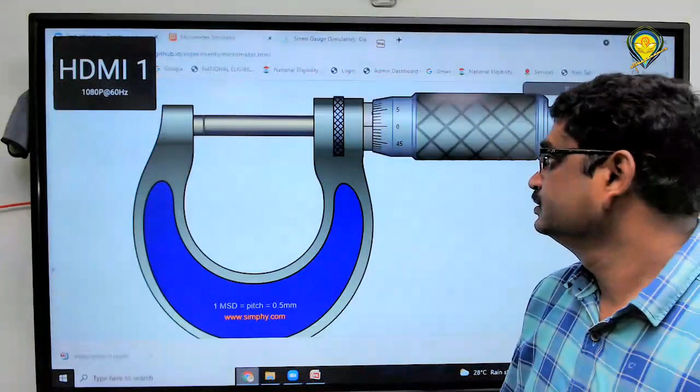Now, this is the screw gauge diagram. What are the different parts? Check it once. So here, what are the different parts? Any readings are there? Scales are there? Check this diagram once. Any scales are there or not? So two different scales are there.

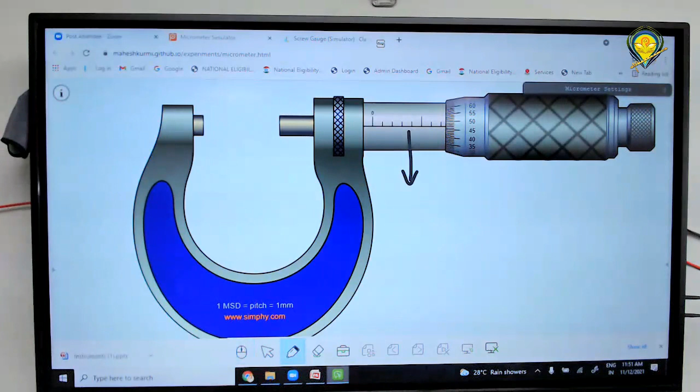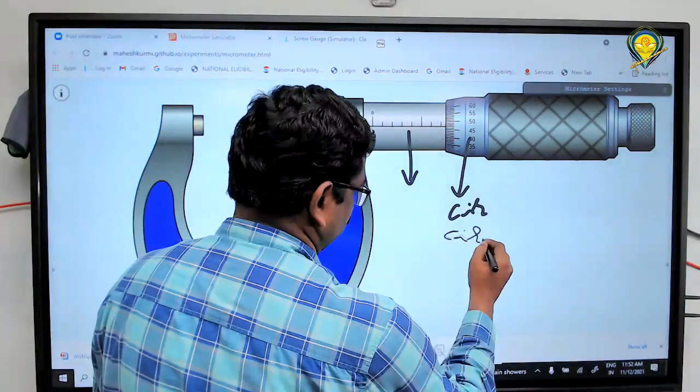So here two different scales are there. Check this diagram. This is the main scale. This one is circular scale. Only two scales are there. One is main scale, the other one is a circular scale.

Now, what are the different parts? These two are called studs. This is a main scale. This one is circular scale. Only these parts are there. Now, what about readings on circular scale? How many readings are there? Check this once. On circular scale, how many readings are there?

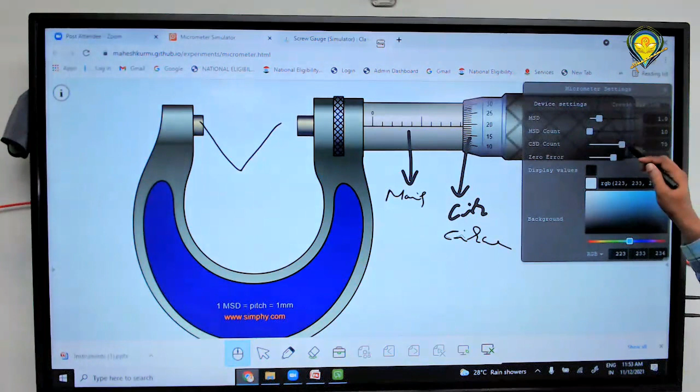So it starts from 0, 5, 10, 15, 20, 25, 30, 35, 40, 45, up to 95 and 0 again. That means 100 readings are there on circular scale. Some screw gauges have 100 scale readings. Some screw gauges have only 50 readings.

So check this one. This is having only 50 readings. It starts from 0, 5, 10, 15, 20, 25, 30, 35, 40, 45 and 0 again. That means it is having only 50 readings on circular scale. Some circular scales have 100 readings, some have 50 readings. So two types of scales are there.

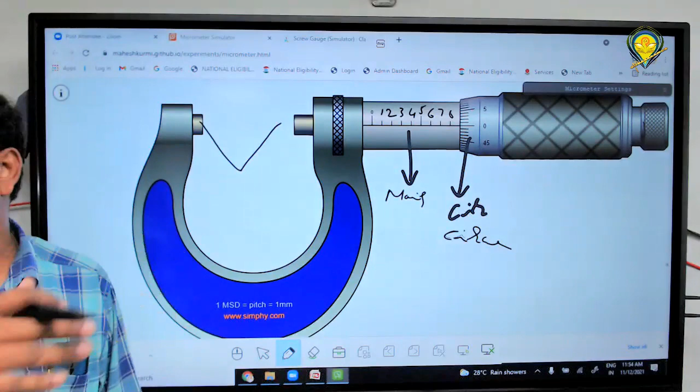Now, what about the horizontal scale? That is the main scale. What is the reading of that main scale? These are millimeter readings only. Each line represents 1 millimeter. This is 0, after that 1, 2, 3, 4, 5, 6, 7, 8, 9, 10 like that. So this is a millimeter scale. What is the unit of the reading? Millimeter only. Main scale reading is in millimeters only.

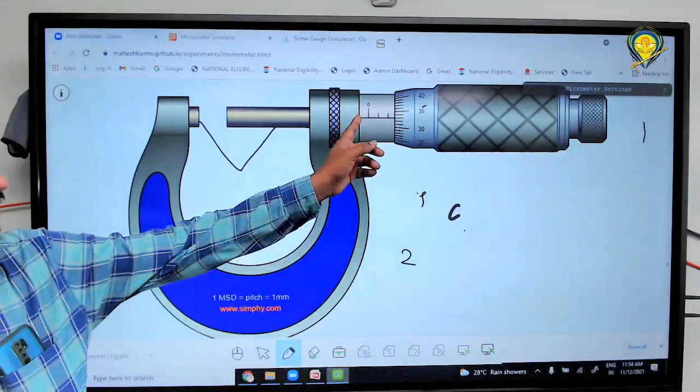So here check this one. What is the reading of this one? Can you identify the reading? How many lines are appearing here on main scale? 0, after that 1 and 2. So main scale reading is 2. You are able to view 0 line, first line, second line. So main scale reading is 2.

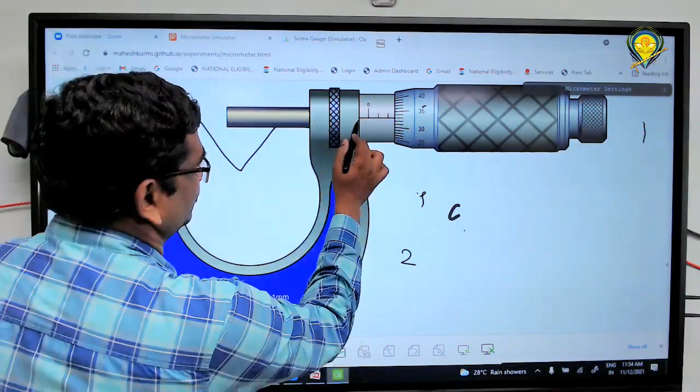Next, circular scale reading. The line that exactly matches with this one is the circular scale reading. So which number matches with the horizontal line? 33. This is 30, 31, 32, 33. So 33 is the circular scale reading. We are able to measure only these values.

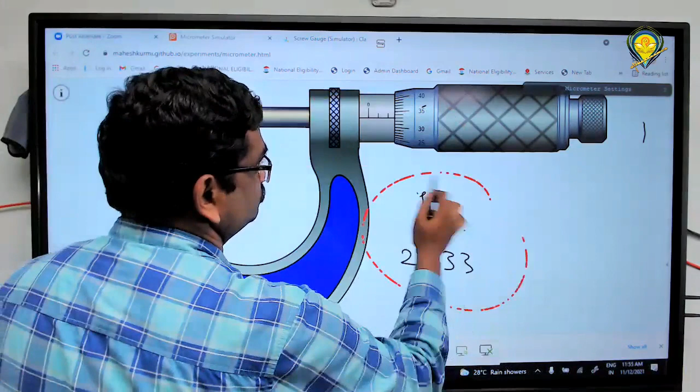For example, just place one object here. Without object, this horizontal line coincides with 0. That indicates that this is errorless. This instrument is not having any error. When the horizontal line matches with 0 without any object, then we can conclude that it has no error.

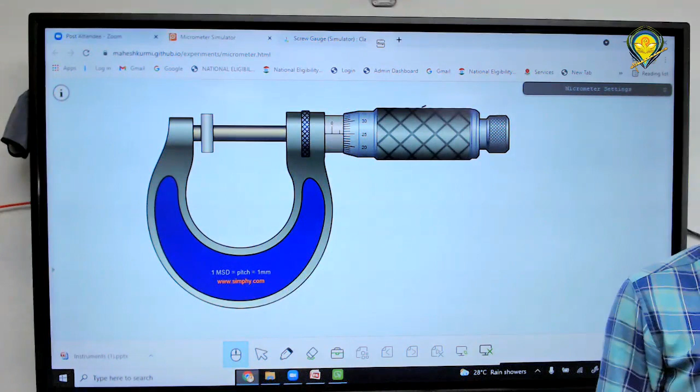Now, just place this object here. Now what is the reading? What is the main scale reading? 1 is the main scale reading. The remaining part you will get with the circular scale. Next, 25 is the circular scale reading. So we are able to measure only these two values by using screw gauge. Are the values clear or not?

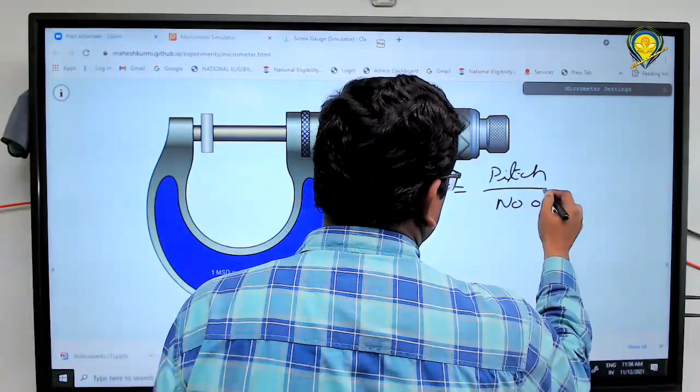Now coming to least count. How are you going to measure the least count of the screw gauge? For least count, we need to follow the basic formula. Least count is equal to pitch of the screw by number of divisions on circular scale. So check this diagram. What is meant by pitch of the screw?

What is meant by pitch of the screw? Pitch of the screw is nothing but the distance traveled on the main scale for one complete rotation of the circular scale. So if you complete one rotation of the circular scale, the distance traveled on the horizontal scale or main scale is nothing but the pitch of the screw.

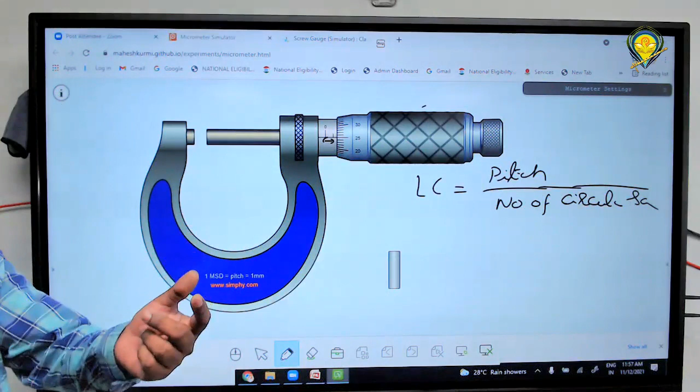There is another definition also. That is the distance between consecutive lines of the main scale. Simply, pitch of the screw is nothing but the distance between these two lines, the distance between two consecutive lines of the main scale, or the distance traveled by the screw gauge in one complete rotation.

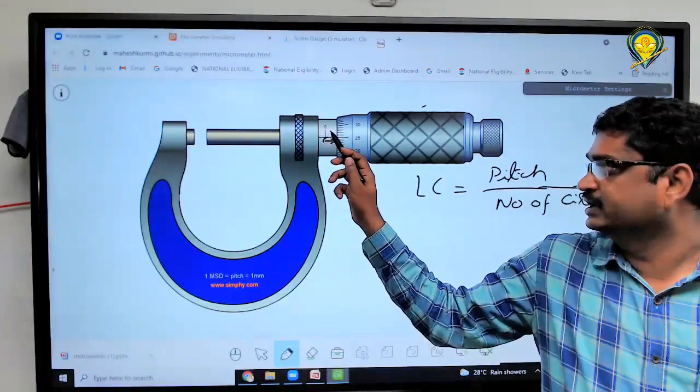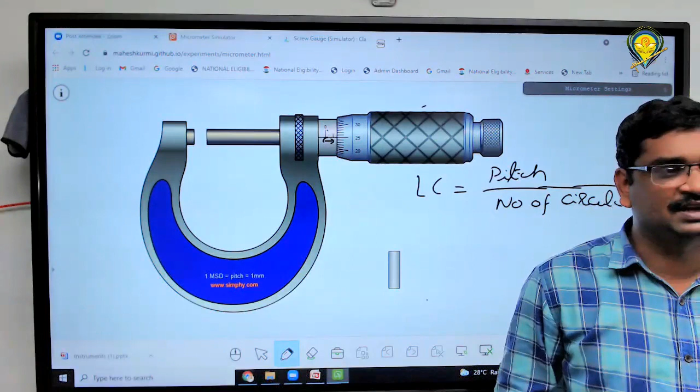So this definition is clear. Pitch of the screw means the distance between consecutive lines in the main scale. Here main scale readings are there. The distance between these two adjacent or consecutive lines is the pitch of the screw. That is one definition. The other definition is the distance traveled by the instrument in one complete rotation. Now let me explain that one.

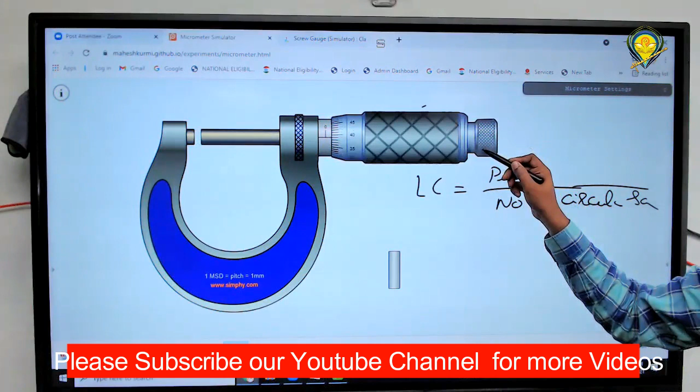So without object, 0 coincides, there is no error. Now try to rotate once. 25, 30, 35, 40, 45. So again it comes to 0. Zero means how many lines we are able to view? See, if I complete one rotation, check it once, how many lines we are able to view? So just after this one, we are able to view one line.

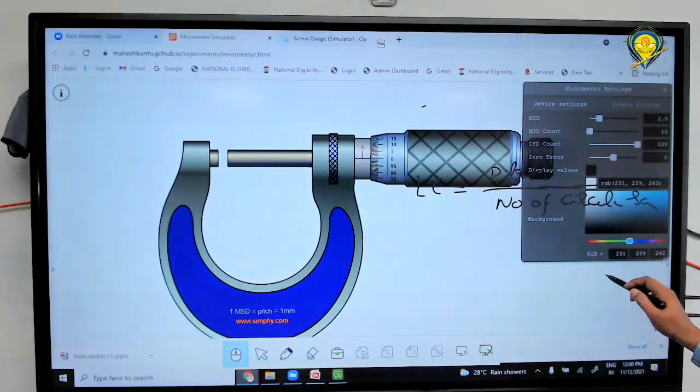So check this one here. I am taking a screw gauge with 100 circular scale readings. Without object, 0 coincides. Next, let me complete one rotation. Just after this 0, another line is there. So if it reaches 0, how many lines are we able to view? Exactly one line. So the reading is 1 mm.

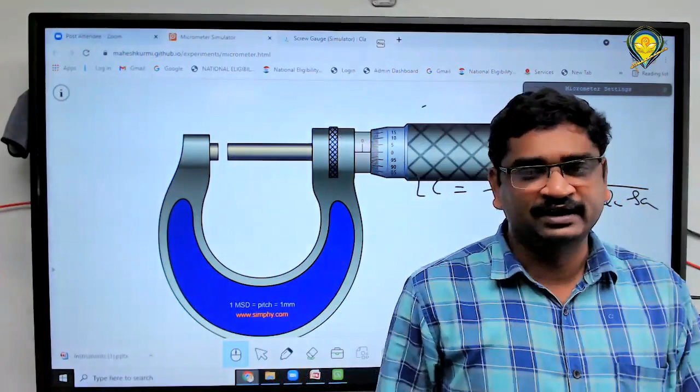So this is the distance traveled in one rotation. How much distance did it travel? 1 mm. For one rotation it travels 1 mm. So that 1 mm is the pitch of the screw. So here two definitions are there for pitch of the screw. One is the distance between adjacent or consecutive lines on the main scale. The other definition is the distance traveled in one complete rotation.

Now check the second definition. The first definition means simply the distance between these two. Distance between these two is the pitch of the screw. Now according to the second definition, pitch of the screw is nothing but the distance traveled by the circular scale in one rotation. Check it once. Let me complete one rotation. If it reaches 0, then it completes one rotation.

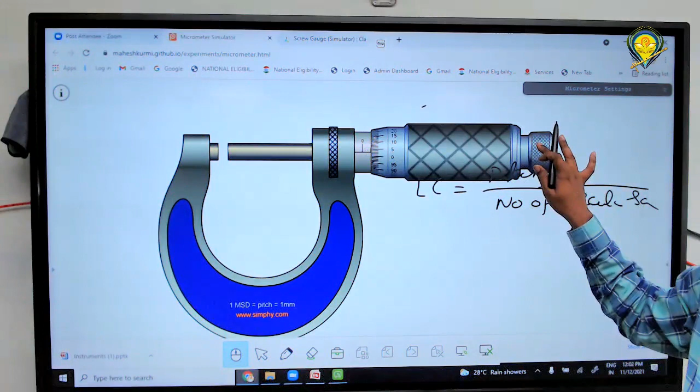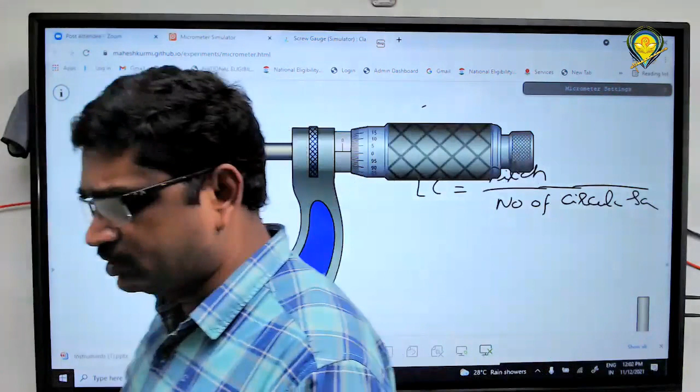One rotation. So how much distance did it travel? From 0 it reaches 1. It starts from 0 and reaches 1, so it travels only 1 millimeter. So the pitch of the screw is how much? 1 mm is the pitch of the screw. So what is the formula for pitch of the screw? Distance traveled in one complete rotation, or the distance between adjacent or consecutive lines. That is the basic definition.

Least count formula: pitch of the screw by number of readings on the circular scale. So that is the formula. Only one formula is there. Here you need to know the pitch of the screw only. There is confusion about the pitch of the screw; if you know that one, then this is completed. Now, go through the topic once.

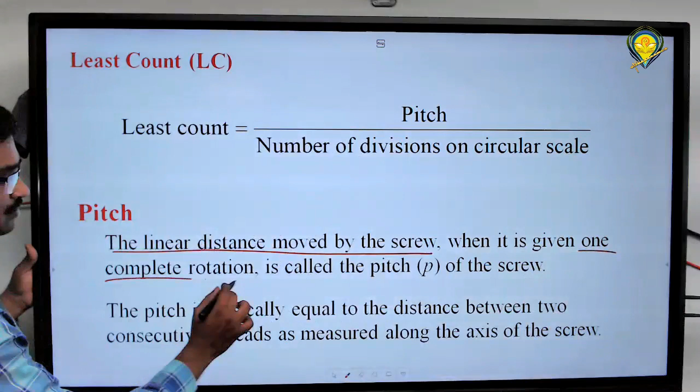What is the basic formula? Least count is pitch of the screw by, not number of rotations, number of divisions on the circular scale. Now, what is meant by pitch of the screw? It is the linear distance moved by the screw in one rotation, or the other definition, the distance between two consecutive threads or consecutive lines of the screw gauge. These are the basic definitions to identify least count.

Write down this one. Screw gauge, first formula, least count, denoted by LC. Least count is pitch of the screw by number of divisions on the circular scale. Pitch of the screw, first definition: horizontal or linear distance moved by the screw in one complete rotation. Write down like that. Second definition: the distance between two consecutive threads.

So from screw gauge to screw gauge, the number of circular scale readings will change, and the horizontal scale readings also change.

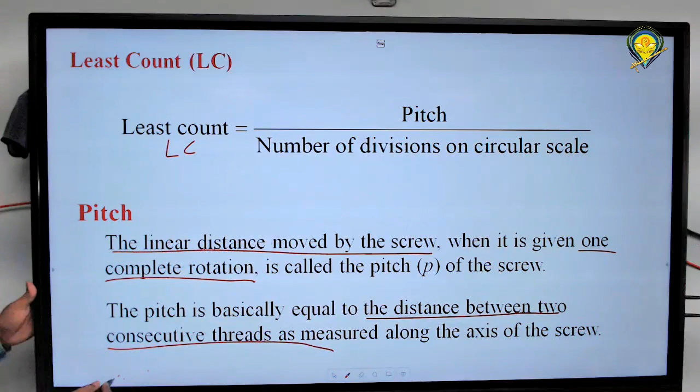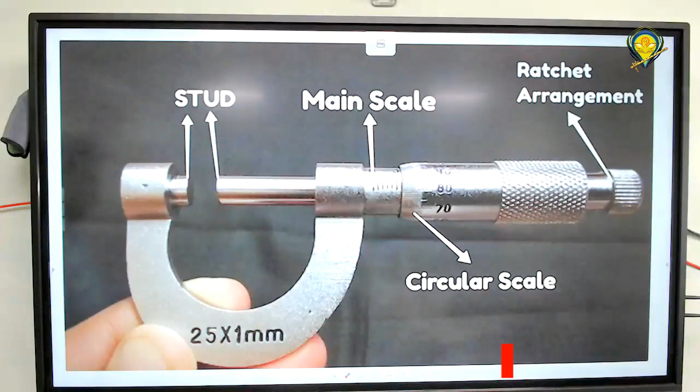So check this diagram once. Here he mentioned 25 into 1 mm. That means main scale reading is 25 millimeter, and each line is 1 mm.

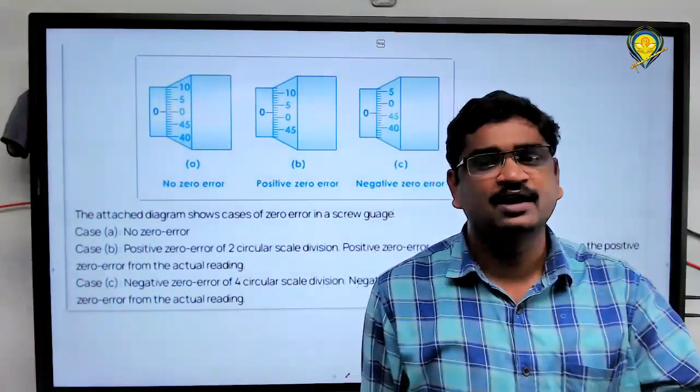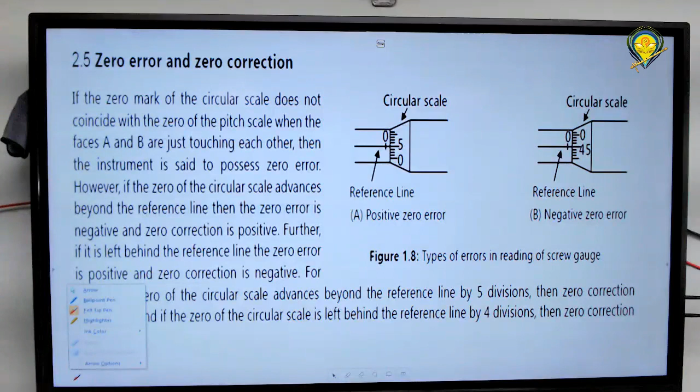Next, coming to the errors. For example, assume that the screw gauge is having some error. Then how are you going to identify whether that is a positive error or negative error? That means we need to add some value or subtract some value if it is having some error. So error unde em cheyali manam aithe add cheyali ledante subtract cheyalsi vastadi. So errors gurinchi kuda telusukovali. What are the different types of errors? Here positive zero error, negative zero error, and no error condition also.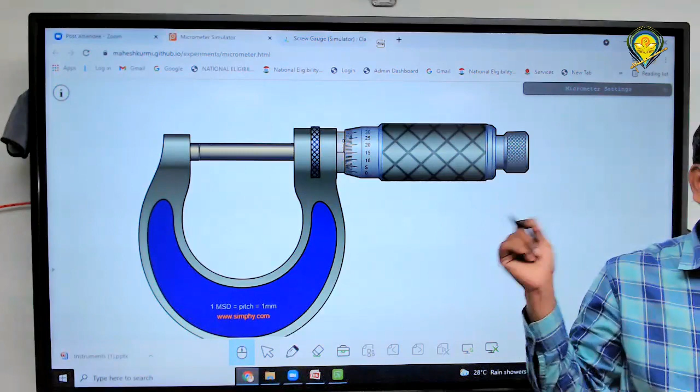Instead of 0, how much is it showing? 15. So instead of 0, it is showing 15. That means it is showing some extra reading. So we need to subtract this much value from the final reading. It is showing extra, so we need to remove that extra part. So this error is called positive zero error.

So for positive zero error, we need to subtract. We need to do the reverse process. If it is positive error, we need to subtract. If it is negative error, we need to add. Our general mathematical rule: this is showing extra, so we need to subtract. Next one, if it is having some negative error, then

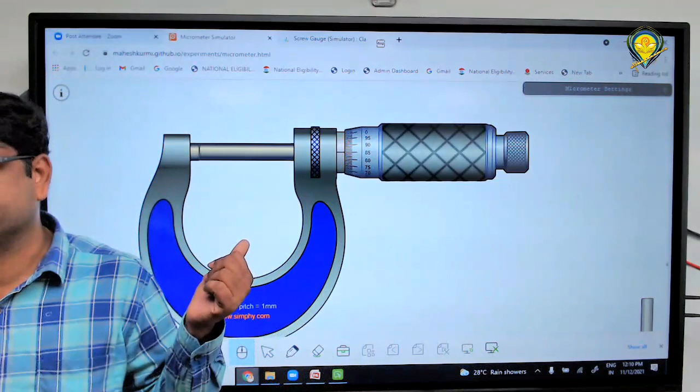Check it once. Now instead of 0, it is showing 85. So how much is the difference? There is a difference of 15 divisions. Is it showing extra? No. Instead of 0, it is showing 85 only. So this is called negative error.

In another way we can write this. Assume that this is the x-axis. Is this the positive side or negative side? Positive side. This one is the negative side. Like that also we can explain. Above, 0, 1, 2, 3, 4, 5 like that. Here, 99, 98, 97, 96 like that.

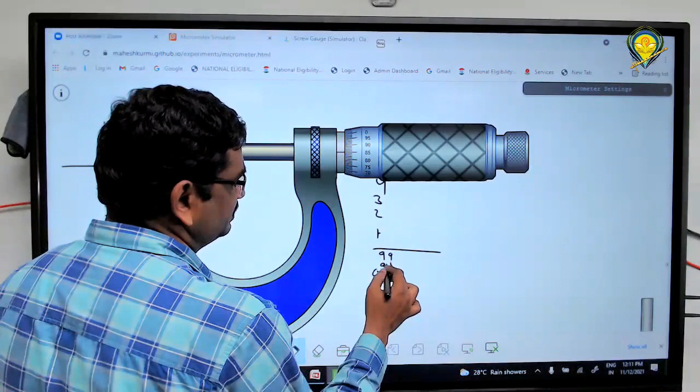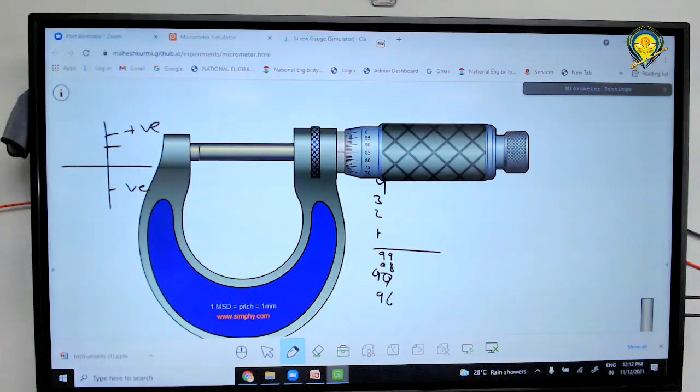If the horizontal axis coincides with these values, that is negative error. If it coincides with these values, then that is positive error. Simply we can remember like that. If it is a positive error, then we need to subtract. If it is a negative error, we need to add. Above the horizontal line means positive error. Below the horizontal line, like 98 to 95 up to 50, that is negative error. So we need to conclude errors like this. We need to finalize whether we need to subtract or add based on the given error.

Now check the original diagram once. Check these diagrams. First diagram indicates that it is having no zero error. We need to call this error as zero error. Name of that error is zero error. So no error for this one, we call it as no zero error.

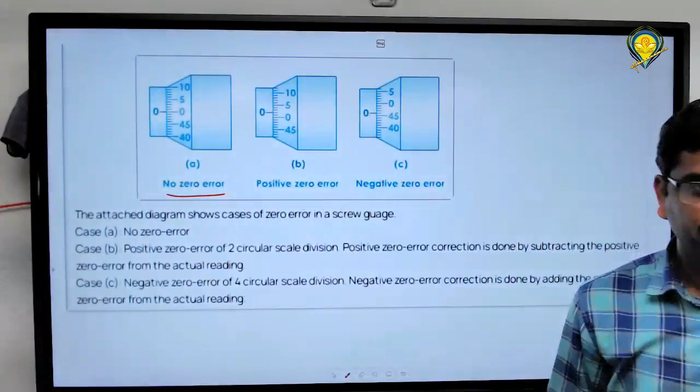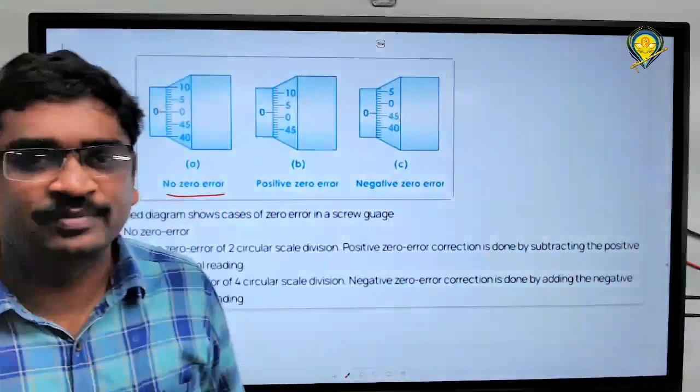No zero error. Next, here instead of 0, it is showing 2. So that we need to call it as positive zero error. How much is the difference? 2. That means we need to subtract this error.

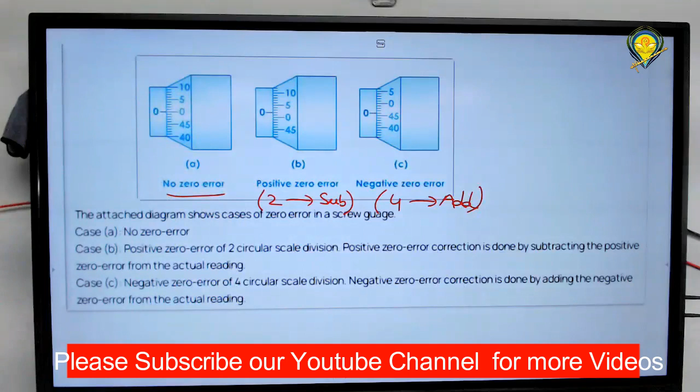Next, this one. Instead of 0, it is showing 46. What is the difference? How many digits difference? 4 digits. So this is a negative zero error and we need to add this error.

So if you know this concept, then this is very easy. Least count calculation and this one - only two concepts are there. Mean scale reading is general only, no need to worry about that. So is the concept clear or not?

No zero error means if the horizontal line coincides with the 0 on circular scale, then we conclude that is no zero error. Now if the horizontal scale matches with 0 to 50 or 0 to 5, 0 to 10 like that, then that is a positive error. Next, if it matches with 45, 46 or 95, 96, 97 like that, then that is a negative zero error. For this one, we need to add. For this one, we need to subtract. So these are the different possible errors in that screw gauge.

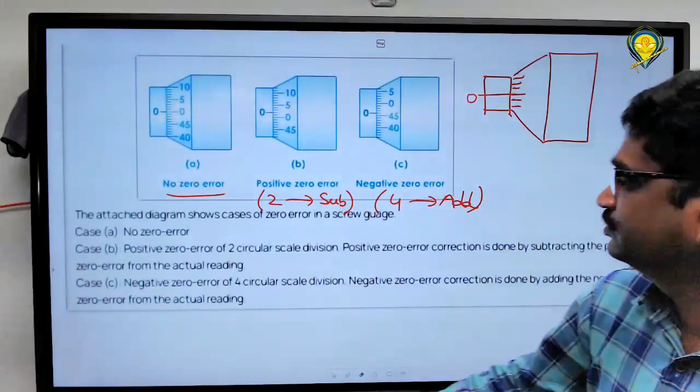Next, check this diagram once. So which error is this one? First diagram - zero error. This one - positive error or negative error? Positive error, it is showing 7, so positive error.

This one, instead of 0, it is showing 47 or 48. 48 it's showing, so negative error. How much is the negative error? 2. So we need to multiply least count also. 2 is the error and we need to multiply that one with the least count. That is the final error.

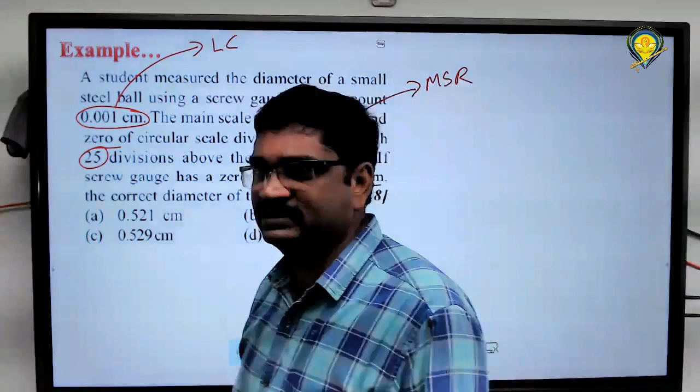And above the reference level, if screw gauge has a zero error of minus 0.004 centimeter, then what is the correct diameter of the ball? Now, first we need to know what is the total reading. How are you going to measure total reading? Total reading of that particular object. So formula for total reading is: total reading equals main scale reading, simply we can call it MSR, plus least count into circular scale reading.

Plus or minus zero error. We need to write a plus or minus error. So this is the formula for total reading. Write down: total reading equal to main scale reading plus least count into circular scale reading plus or minus zero error.

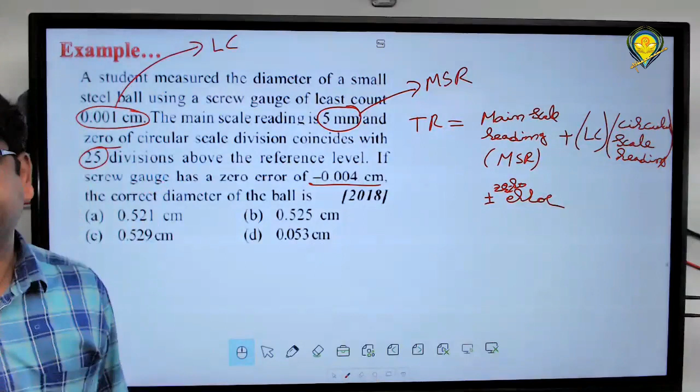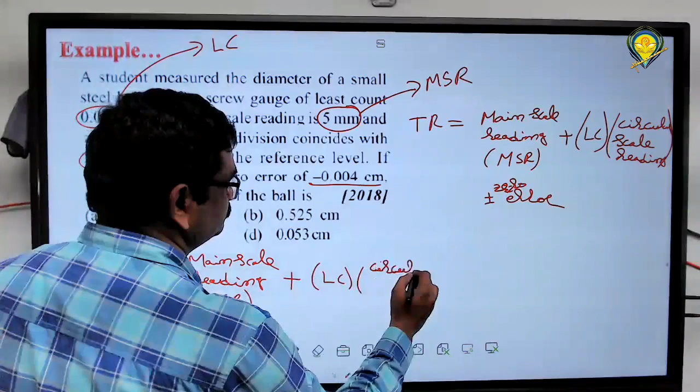So total reading equal to main scale reading, MSR, plus least count into circular scale reading, CSR, plus or minus zero error.

So what is the main scale reading? 5 mm. So total reading equal to main scale reading is 5 mm plus least count 0.001 centimeters into circular scale reading 25 divisions. Now there is error, minus 0.004 centimeter.

So that means we need to add or subtract. We need to add. This is a negative error. Negative error means we need to add, positive error means we need to subtract. So we need to add 0.004, this is also in centimeter.

So try to convert this one in terms of centimeter, since that is in millimeter. So write this one in terms of centimeter: this is 0.5 centimeter plus how much is this one? 0.025 plus 0.004.

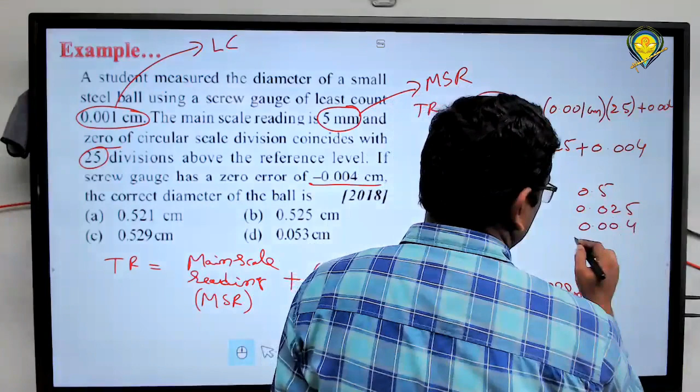Now add all these three: 0.5, 0.025, 0.004. So first write like this, after that add. Same digits we need to add, that means same decimal points. So 0 and 0, now 9, 2, 5. 0.529 centimeter.

Simple, calculation is very simple, but you need to know the terms. So what is main scale reading? What is circular scale reading? What is the error? If you know all these, then it is very easy.

JEE Main 2020. Now what we need to calculate, let's finalize that one. So screw gauge has 50 divisions on circular scale, that means number of divisions on circular scale is how many? 50. Now circular scale is 4 units ahead of the pitch scale.

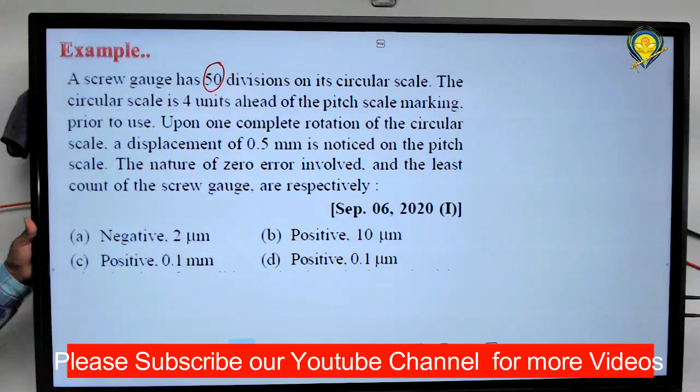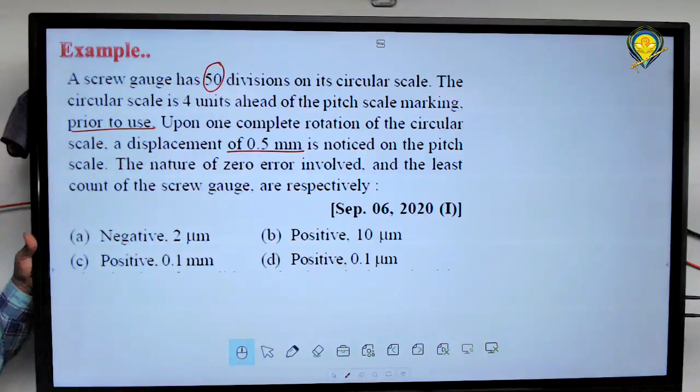Circular scale is 4 units ahead of the pitch scale, prior to use. So what is meant by prior to use? That means before placing the object, measurement is 4 units ahead of the zero. Next one, upon one complete rotation of the circular scale, displacement is 0.5 mm. So for one rotation, what is the distance traveled? 0.5 mm, that means this is the pitch of the screw.

So this is number of circular scale divisions. Next one: the nature of zero error involved, that means we need to identify that error is positive or negative, or whether it is zero error. We need to identify. Next, the least count of the screw gauge. We need to identify two quantities: one is which type of error, other one is least count.

Now, which type of error is that one? So that is 4 division ahead of zero, so that is positive error. So with positive, 3 options are there, so this one is a wrong one.

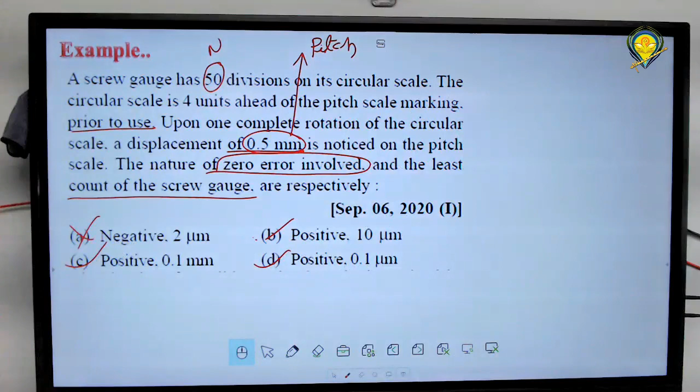Now let's finalize least count. Least count formula: pitch of the screw by number of circular scale divisions. Now what is the value of pitch of the screw? 0.5 mm by circular scale divisions are 50, or 0.1 by 10, or 0.01 mm.

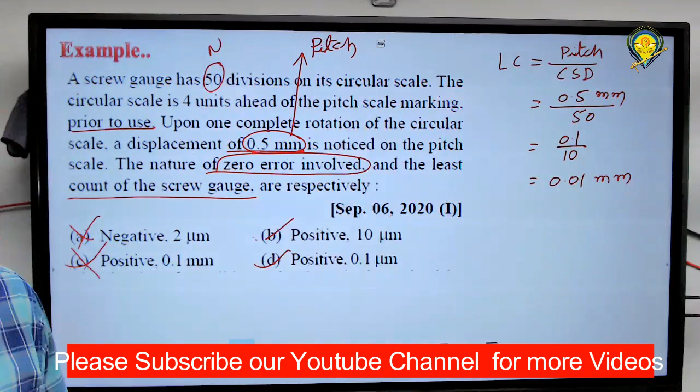Can I write like this? So check if the option is there or not: 0.01 mm, 0.1 mm, so this is wrong. So here 0.1 micrometer, 10 micrometer, that means you need to convert that one, you need to write that in terms of micrometers.

0.01 milli means 10 power minus 3 meter. 1 milli means 10 power minus 3. So 0.01 can be written as 10 power minus 2, remaining as it is. So total 10 power minus 5. But micro means 10 power minus 6. So can I write this one as 10 into 10 power minus 6? Just multiply these two, then you will get this one. So 10 power minus 6 meter is nothing but micrometer.

So 10 micrometer is the answer. Option B is the correct one.

So only least count here we calculated: pitch of the screw by number of divisions only. Now bear in mind this one for micrometer, that is based on the final answer.

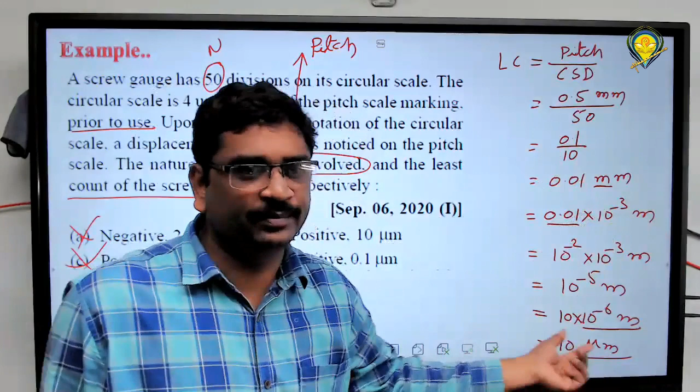Previous JEE question only. So can you identify the reading of this one?

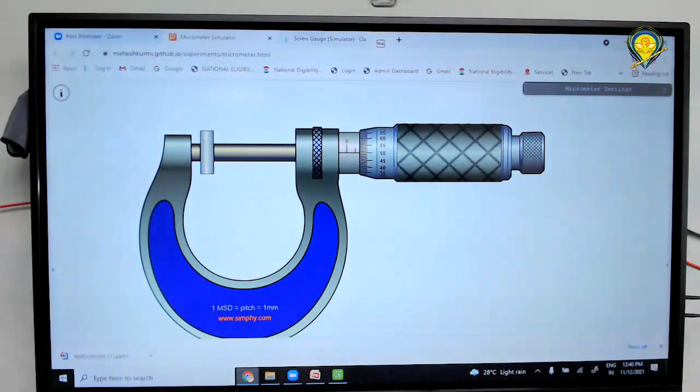This is not having any error, zero error. Just let me place this one. Identify the reading of this one. What is the main scale reading? So how many digits are you able to use? After 0, 1 we are able to use. So the main scale reading is 1. So MSR equal to 1.

Next, number of least count. We need to calculate least count. So number of circular scale readings or circular scale divisions, how many are there? So 60, 65 also are able to use or not? So it may be 100. Check it once. 90, 95 also there, na? So 100 readings are there.

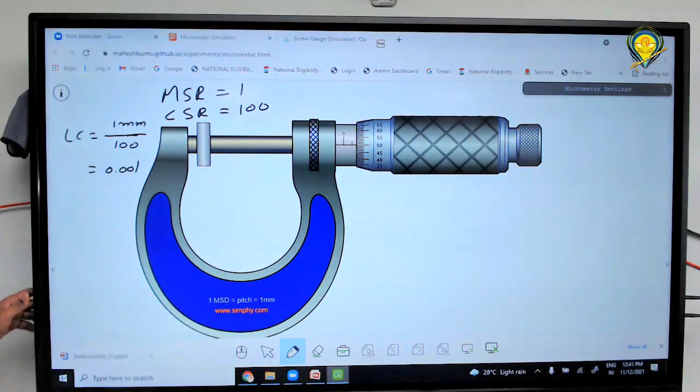Now each digit is 1 mm. So least count is, what is the value of least count? Least count is equal to pitch of the screw by number of divisions. That is 1 mm by number of divisions, 100. So 0.001 or 0.01? 0.01 mm, that is the least count.

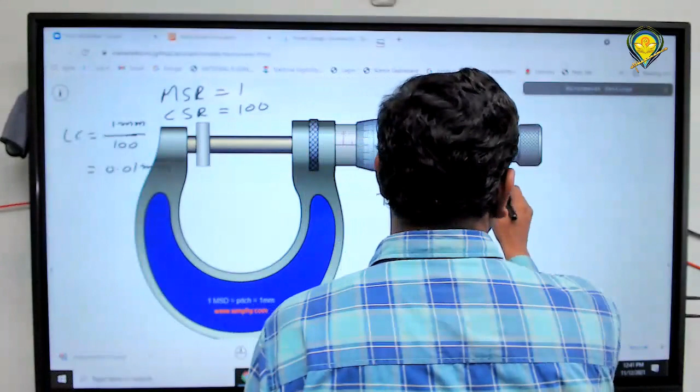Now total reading formula: main scale reading plus least count into circular scale reading plus or minus zero error. So there is no zero error, na? So that this is zero only.

Now substitute, main scale reading is 1 mm plus the least count is 0.01 mm into circular scale reading is how much? Is it 100? Check this reading once. For horizontal line 50 reading is there, na? So the circular scale reading is 50. Circular scale divisions are 100. Circular scale reading is 50 only. So this is circular scale divisions, not reading.

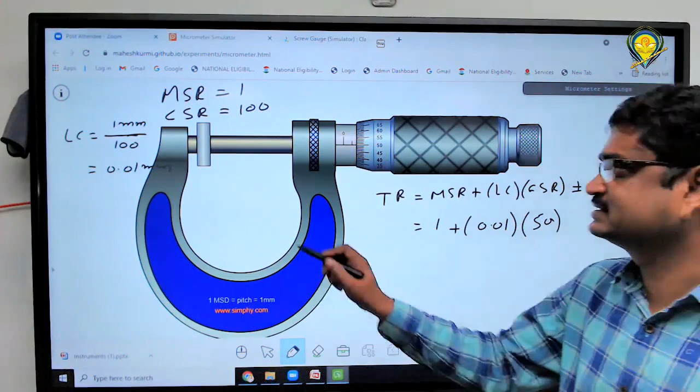Now rearrange this one. So 1 plus 0.01 into 50, that equal to 1.5 mm. So in screw gauge you will generally get an answer in millimeters. In vernier calipers you will get it in centimeters. So 1.5 mm.

Check the reading once. So this is 1.5 mm. So main scale reading is how much? 1 mm. So circular scale reading 0.5 mm. After multiplication of least count, 50 circular scale division coincides, na? So 50 into least count, so 0.5 mm, this one.

Is the reading clear or not? Are you able to get these readings? So only 2 readings, main scale reading and circular scale reading. Only 2 readings are there in the screw gauge concept. But you need to know errors, whether it is positive error or negative error or zero error, we need to finalize. If you know that one, then this is a very easy concept. Only confusion is in errors only. No other confusion is there. Right? Is this clear or not?

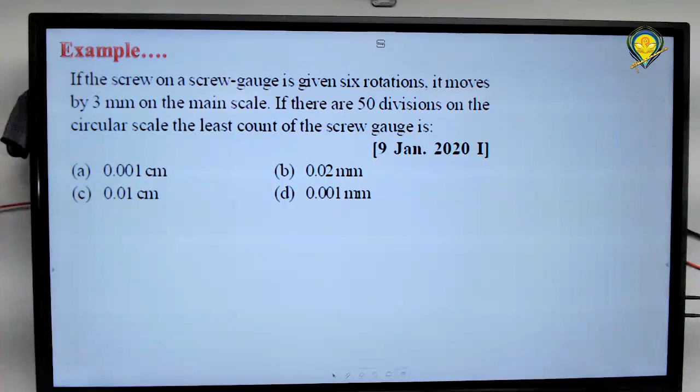What is the basic formula for least count? Pitch of the screw by number of circular scale divisions. So what is the value of pitch there? 0.5. But here we gave 3 mm.

What is the answer? So here 6 rotations, for 6 rotations it traveled 3 mm. But pitch is nothing but distance traveled in 1 rotation. For 6 rotations it traveled 3 mm means for 1 rotation how much it need to travel? 0.5 mm, or 3 by 6 rotations, 0.5. So it needs to travel 0.5 mm for each rotation. For 6 rotations it travels 3 mm means for each rotation it needs to travel 0.5 mm. So that pitch is nothing but 0.5 mm.

Where circular scale divisions are 50. So 0.5 by 50, can I write like this? Cancel 5, that equal to 0.01 mm.

0.001 centimeter. So with this option, any option is there with this answer? No. Try to convert this one in terms of meters, centimeters. Extra zero we need to place after the decimal point. To convert into centimeter, we need to place an extra zero after the decimal point. So 0.001 centimeter.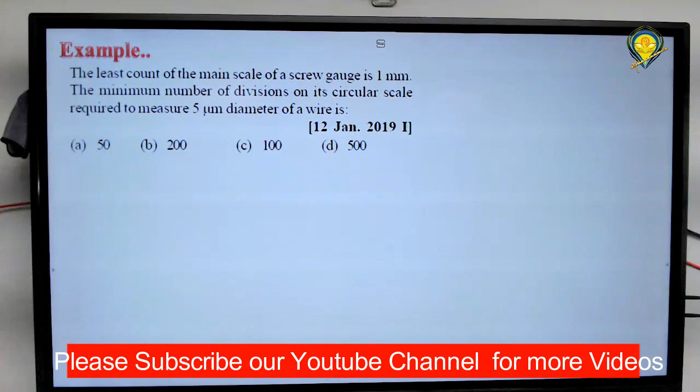Try to solve this one. The least count of main scale of a screw gauge is 1 mm. The minimum number of divisions on circular scale required to measure 5 micrometer diameter of a wire. This is not a direct formula, so just go through that one. Read once again: least count of a main scale of a screw gauge is given as 1 mm. The minimum number of divisions on the circular scale required to measure 5 micrometer diameter wire.

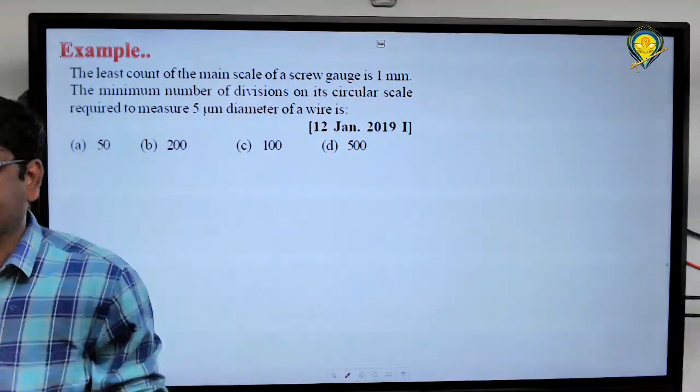That means what we need to calculate? Number of divisions on circular scale we need to calculate. That is our aim. So what we need to calculate? Number of divisions on circular scale. So use that data and try to calculate that one.

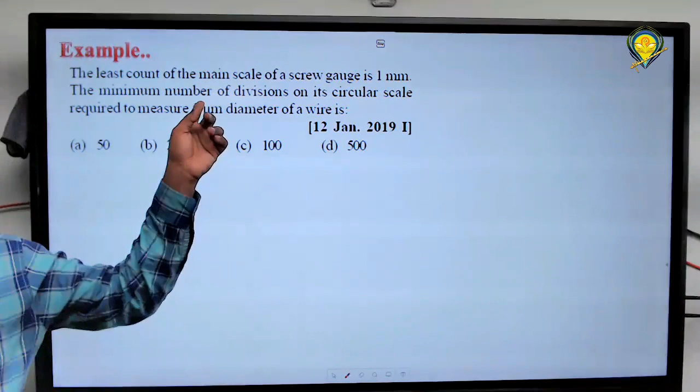So what is the least count? 1 millimeter. But we need to measure 5 micrometer. That means less than that least count, we need to measure. What is meant by least count? Least count is the least possible value measured by that instrument, is it correct or not? But we need to measure less than the least count value. That means we need to increase the number of circular scale divisions in that case. Then we can measure. Now, so what are the number of circular scale divisions?

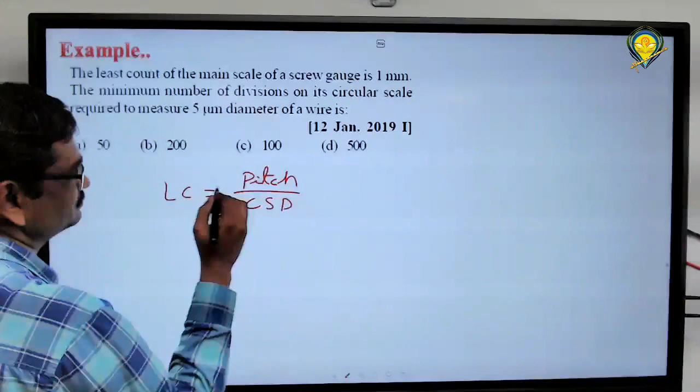What is the formula for least count? Least count equals pitch of the screw by number of circular scale divisions. Now, here 5 micrometer and 1 mm, two quantities are there. We need to identify the number of divisions. Rearrange this one: number of circular scale divisions equals pitch of the screw by least count.

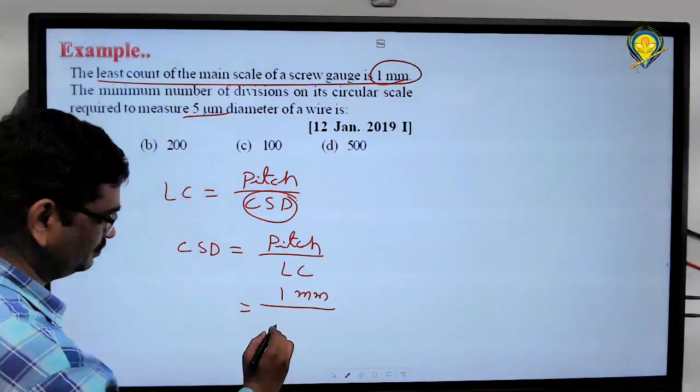Now, what is pitch of the screw? 1 mm. It can travel only 1 mm, so pitch of the screw is 1 mm. What is the least possible value we need to measure? 5 micrometer. Take that one as the least count, 5 into 10 power minus 6. Least count means the least possible value that can be measured, so I am taking this as the least count.

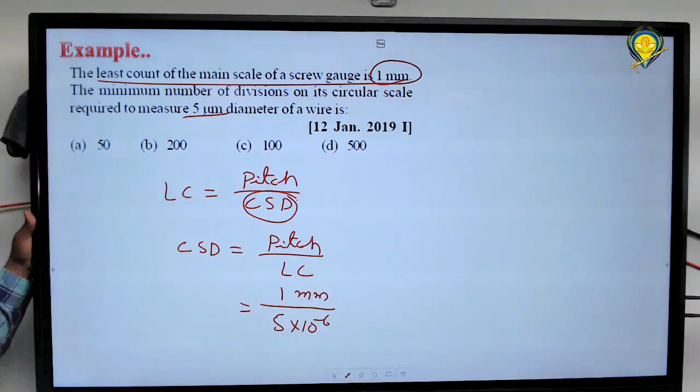1 mm means 10 power minus 3 meter. This one is 5 into 10 power minus 6 meters. So 10 power 3 by 5, or 1000 by 5, is equal to 200. So number of divisions required is 200. We just need to reverse that. Generally, you may take 5 micrometer by 1 mm as the answer.

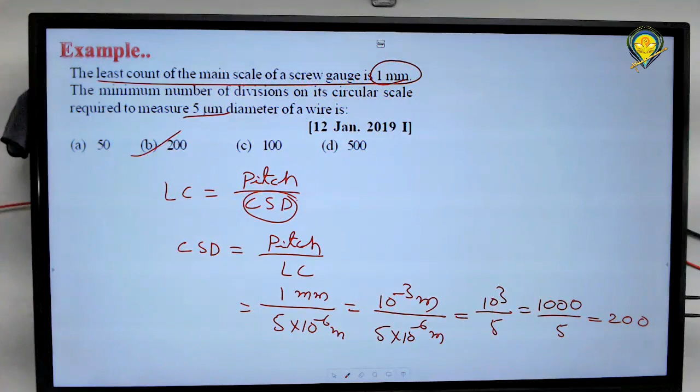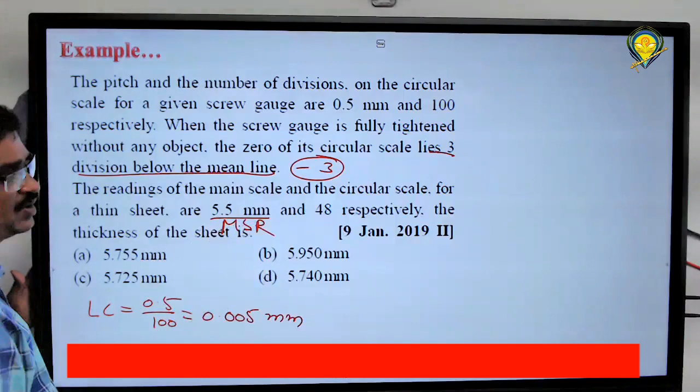Readings on the main scale and circular scale are given: main scale reading is 5.5 mm and circular scale reading is 48. Now, what is the total reading? Thickness of the object is nothing but total reading. Total reading formula is main scale reading plus least count into circular scale reading, plus or minus least count into coincidence. We need to multiply both with least count.

Main scale reading is 5.5 plus least count 0.005 into circular scale reading 48. Next, for error do we need to add or subtract? Plus least count 0.005 into 3. Or directly we can add to the reading.

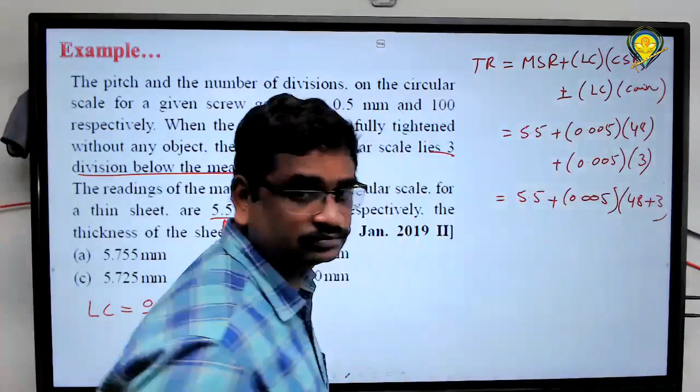51. 5.5 plus 0.005 into 51. 255, so how many zeros are there? 0.255. Add these: 5.5 plus 0.255 gives 5.755.

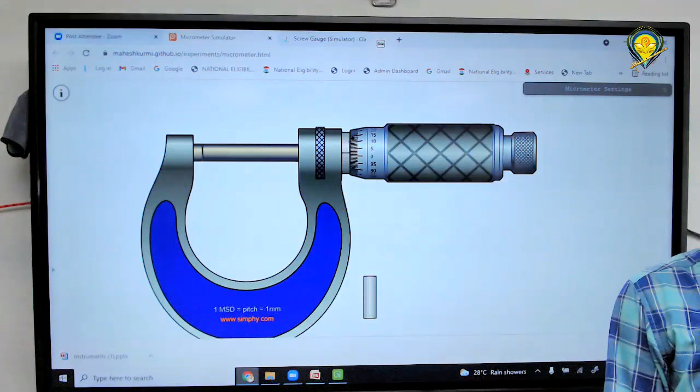Zero of the circular scale lies 3 divisions below. Check that once. Is it the same or not? Zero of the circular scale lies 3 divisions below. Which error is that? That is a positive error. So we need to subtract this one.

48 minus 3 is 45. 45 into 0.005 is 0.225. That means 5.725 millimeter.